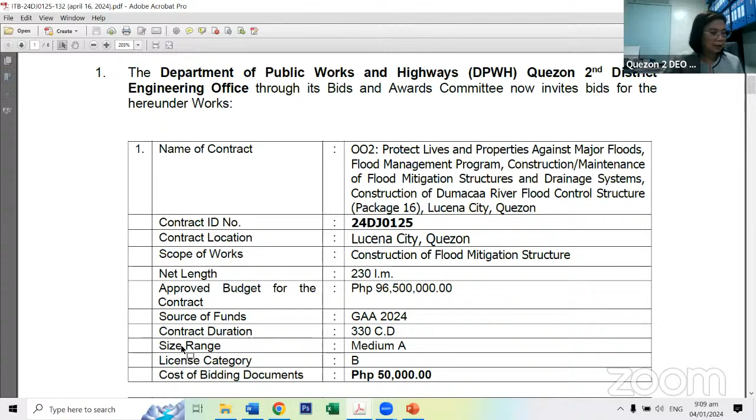Number 1 is 24DJ0125: Protect lives and properties against major flood, management program, construction and maintenance of flood mitigation structure and drainage system, construction of Dumacaa flood control structure, package 16, Lucena City, Quezon. Scope of work is construction of flood mitigation structure. Net length is 230 linear meters. Approved budget for the contract is 96,500,000 pesos. Contract duration is 330 calendar days. Size range of contractor is medium A with license category B. Cost of bidding documents is 50,000 pesos.

Next is 24DJ0126-002: Protect lives and properties against major flood, management program, construction and maintenance of flood mitigation structures and drainage system, construction of the Dumacaa flood control structure, package 17, Lucena City, Quezon. Scope of work, construction of flood mitigation structure, net length is 230 linear meters. Approved budget for the contract, 96,500,000 pesos.

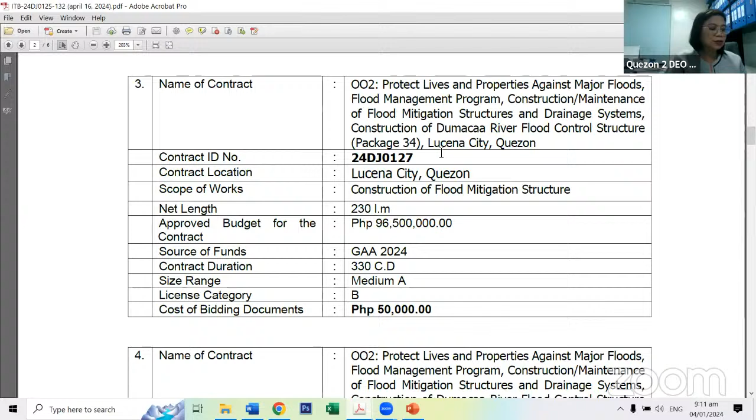24DJ0127-002, Protect Lives and Properties Against Major Flood Management Program, construction and maintenance of flood mitigation structure and drainage system, construction of Dumacaa River flood control structure, package 34, Lucena City, Quezon. Scope of work: construction of flood mitigation structure, net length is 230 linear meters. Approved budget for the contract is 96,500,000 pesos. Contract duration is 330 calendar days. Contractor size range is medium A with license category B. Cost of bidding documents is 50,000 pesos.

Number 4 is 24DJ0128-002. Protect Lives and Properties Against Major Flood Management Program, construction, maintenance of flood mitigation structure and drainage system, construction of Dumacaa River flood control structure, package 35, Lucena City, Quezon. Scope of work: construction of flood mitigation structure. Net length is 230 linear meters. Approved budget for the contract is 96,500,000 pesos. Contract duration is 330 calendar days. Contractor size range, medium A with license category B. Cost of bidding documents, 50,000 pesos.

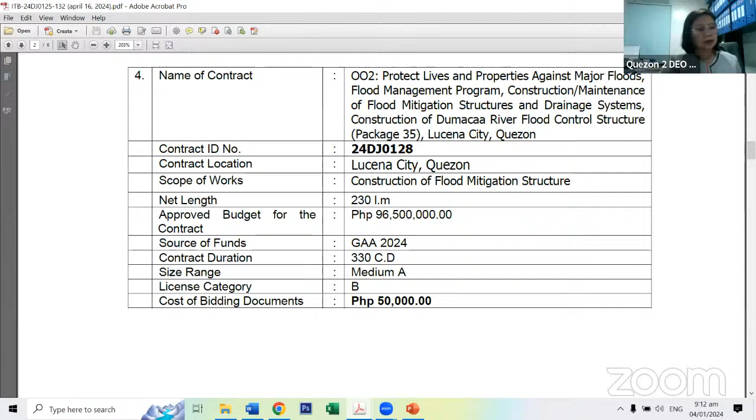Number 5 is 24DJ0129-002, Protect Lives and Properties Against Major Floods Management Program, construction, maintenance of flood mitigation structures and drainage systems, construction of Dumacaa River flood control structures, package 38, Lucena City, Quezon. Scope of work: construction of flood mitigation structure. Net length is 230 linear meters. Approved budget for the contract is 96,500,000 pesos. Contract duration, 330 calendar days. Contractor size range, medium A with license category B. Cost of bidding documents is 50,000 pesos.

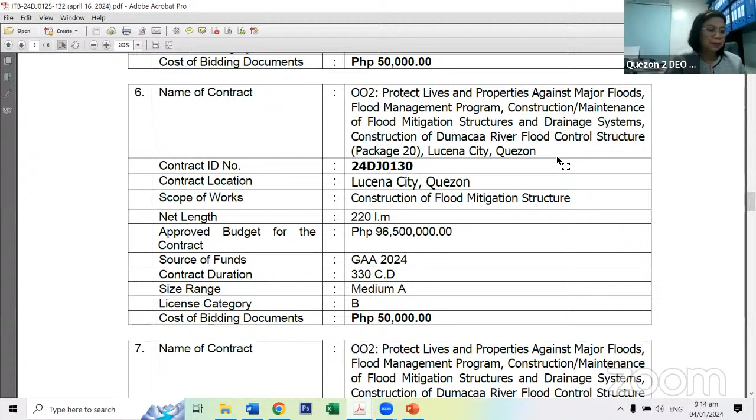Number 6, 002, Protect Lives and Properties Against Major Flood Management Program, construction, maintenance of flood mitigation structures and drainage systems, construction of Dumacaa River flood control structures, package 20, Lucena City, Quezon. Contract ID is 24DJ0130. Scope of work: construction of flood mitigation structure. Net length is 220 linear meters. Approved budget for the contract is 96,500,000 pesos. Source of fund, GAA 2024. Contract duration is 330 calendar days. Contractor size range, medium A with license category B. Cost of bidding documents, 50,000 pesos.

Number 7, 24DJ0131-002, Protect Lives and Properties Against Major Floods Management Program, construction, maintenance of flood mitigation structures and drainage system, construction of Dumacaa River flood control structures, package 36, Lucena City, Quezon. Scope of work: construction of flood mitigation structure. Net length is 230 linear meters. Approved budget for the contract is 96,500,000 pesos. Contract duration is 330 calendar days. Contractor size range, medium A with license category B. Cost of bidding documents, 50,000 pesos.

And number 8, 24DJ0132-002, Protect Lives and Properties Against Major Floods Management Program, construction, maintenance of flood mitigation structure and drainage system, construction of Dumacaa River flood control structure, package 37, Lucena City, Quezon. Scope of work: construction of flood mitigation structure. Net length is 230 linear meters. Approved budget for the contract is 96,500,000 pesos. Contract duration is 330 calendar days. Contractor size range, medium A with license category B. Cost of bidding documents is 50,000 pesos.

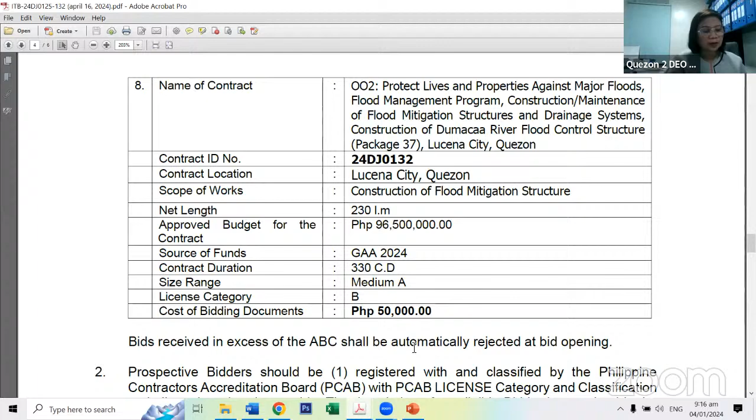So our bid opening is April 16, 2024 at 9 a.m., after the deadline of the submission of bids, at the BAC conference room. Thank you, and let's start the presentation of scope of work and plans.

Good morning po. Project name: 002, Protect Lives and Properties Against Major Floods Flood Management Program, Construction, Maintenance of Flood Mitigation Structures and Drainage Systems. Construction of Dumacaa River Flood Control Structure Package 16, Lucena City, Quezon, with contract ID of 24DJ0125.

Plans of the proposed project. This is the title page. Index of drawings. General construction notes. Legends. Design symbols. Location map, vicinity map, key map, layout plan. Summary of quantities.

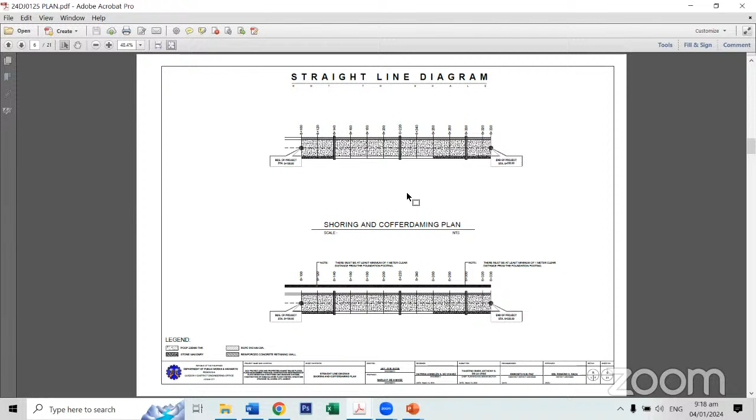Straight line diagram, shoring and cofferdam plan. Typical cross section. Weep holes, partial elevation, parapet blocks, and large section. Stone masonry typical cross section. Details of weep holes, section showing curb and gutter, section showing metal grating and catch basin. Pavement layout plan for roadway.

Detail section of retaining wall. Isometric drawings, cross section of sheet piles. Detailed plan of project billboard. Detailed plan of field office. Plan and profile of the project. And the rest are the cross sections of the project.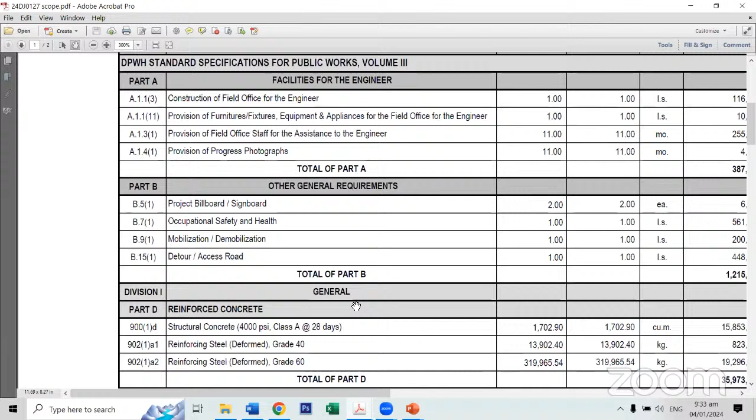For Part A, facilities for the engineer: construction of field office for the engineer, provision of furnitures, fixtures, equipment, and appliances for the field office for the engineer, provision of field office staff as assistants to the engineer, and provision of progress photographs. Part B, other general requirements: project billboard, signboard, occupational safety and health, mobilization, demobilization, detour, and access road.

For Part D, reinforced concrete: structural concrete 4,000 PSI Class A at 28 days. Reinforcing steel, deformed, grade 40. Reinforcing steel, deformed, grade 60.

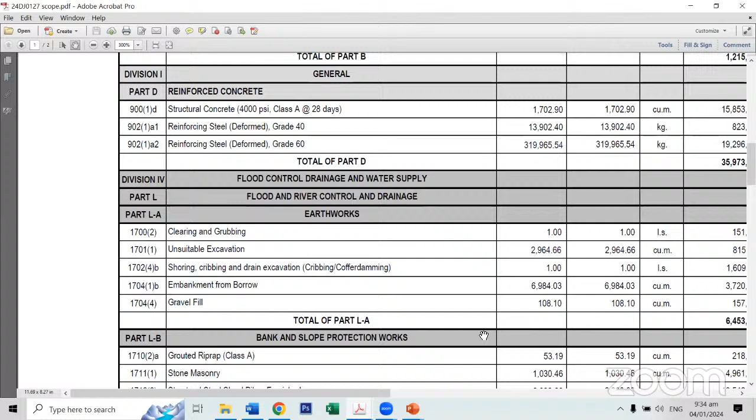For Part L-A, earthworks: clearing and grubbing, unsuitable excavation, shoring, cribbing and drain excavation, cribbing or coffer damming, embankment from borrow, gravel fill. Part L-B, bank and slope protection works: grouted riprap Class A, stone masonry, structural steel sheet piles furnished, structural steel sheet piles driven.

For Part L-C, drainage works: pipe culverts 910 millimeters diameter, Class 2 RCPC, adjusting catch basin. For Part C, earthworks: foundation fill, subgrade preparation, common material. Subbase and base course: aggregate subbase course.

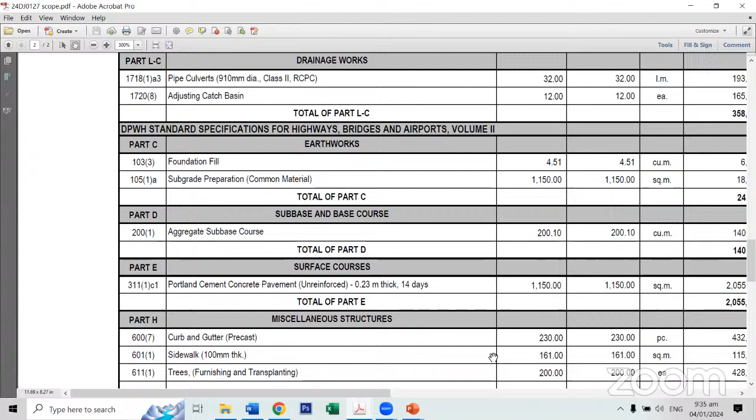For Part E, surface courses: Portland cement concrete pavement, unreinforced, 0.23 meters thick, 14 days. Part H, miscellaneous structures: curb and gutter precast, sidewalk 100 millimeters thick, trees furnishing and transplanting.

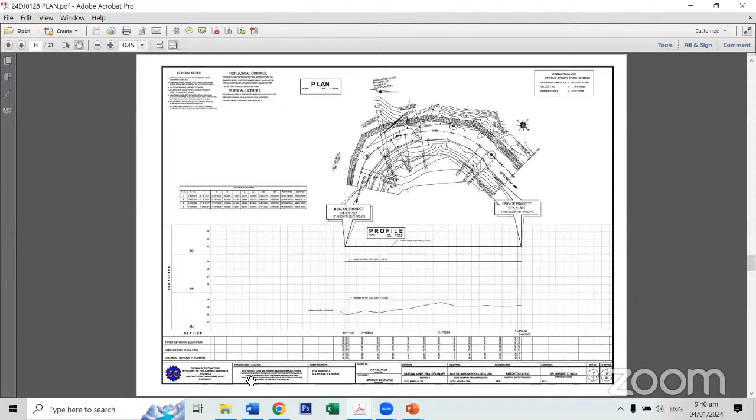For the scope of works of the project, Part A, facilities for the engineer: construction of field office for the engineer, provision of furnitures, fixtures, equipment, and appliances for the field office for the engineer, provision of field office staff for the assistance of the engineer, provision of progress photographs. Part B, other general requirements: project billboard, signboard, occupational safety and health, mobilization, demobilization, detour access road.

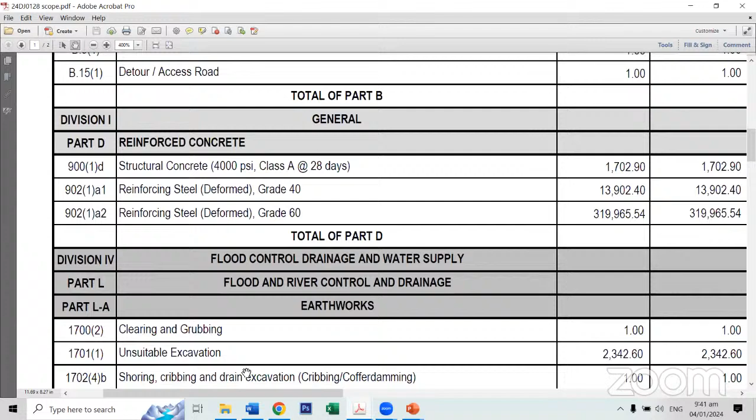For Part D, reinforced concrete: structural concrete 4,000 PSI Class A at 28 days. Reinforcing steel, deformed, grade 40. Reinforcing steel, deformed, grade 60.

For Part L-A, earthworks: clearing and grubbing, unsuitable excavation, shoring, cribbing and drain excavation, cribbing or coffer damming, embankment from borrow, gravel fill. For Part L-B, bank and slope protection works: grouted riprap Class A, stone masonry, structural steel sheet piles furnished, structural steel sheet piles driven.

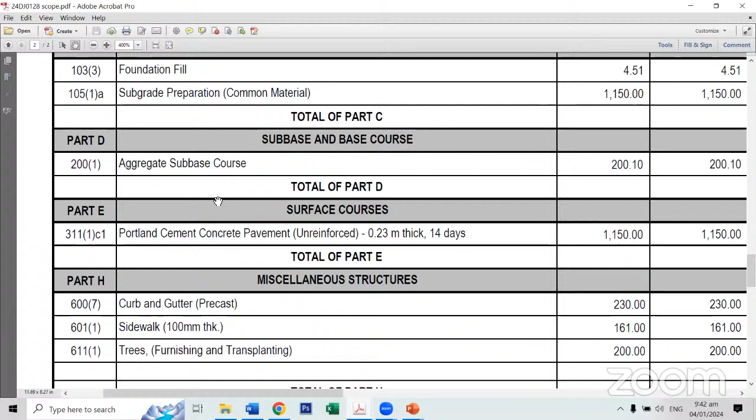For Part L-C, drainage works: pipe culverts 910 millimeters diameter, Class 2 RCPC, adjusting catch basin. For Part C, earthworks: foundation fill, subgrade preparation, common material. For Part D, subbase and base course: aggregate subbase course. Part E, surface courses: Portland cement concrete pavement, unreinforced, 0.23 meters thick, 14 days.

Part H, miscellaneous structures: curb and gutter precast, sidewalk 100 millimeters thick, trees furnishing and transplanting.

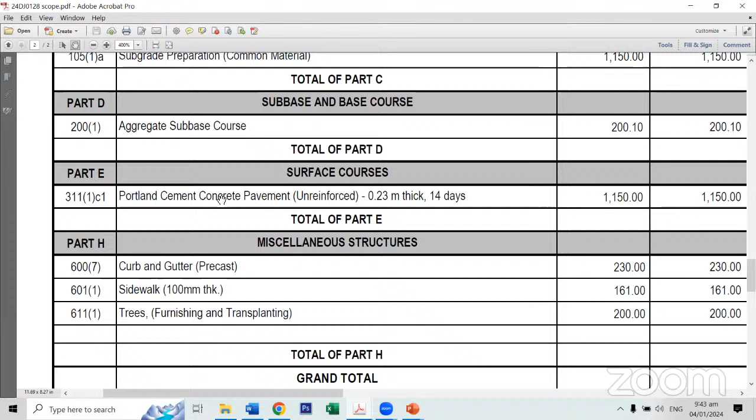Minimum equipment requirements: backhoe or backhoe with breaker, dump truck, plate compactor, cutting outfit, one bagger mixer, water pump, water truck, low bed trailer, vibratory roller, bar cutter, motorized road grader, bar bender, welding machine, cargo truck, truck mounted boom truck, generator set, vibro hammer, truck mounted crane, service crane, concrete vibrator, payloader, and joint sealer machine.

Manpower requirements: one project manager with 5 years total experience, one project engineer with 5 years total experience, one accredited materials engineer 1, one construction foreman with 5 years total experience, one first aider, and one safety officer.

Approved budget for the contract, 96,500,000 pesos. Contract duration, 330 calendar days.

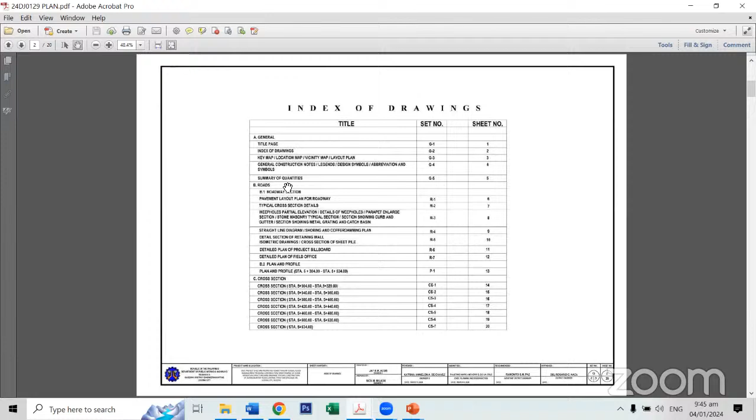Key map, vicinity map, location map, and layout plan.

General construction notes.

Summary of quantities. Pavement layout plan for roadway. Detailed connection of reinforced structure to sidewalk and parapet blocks. Detail of expansion joint at certain intersections and structures.

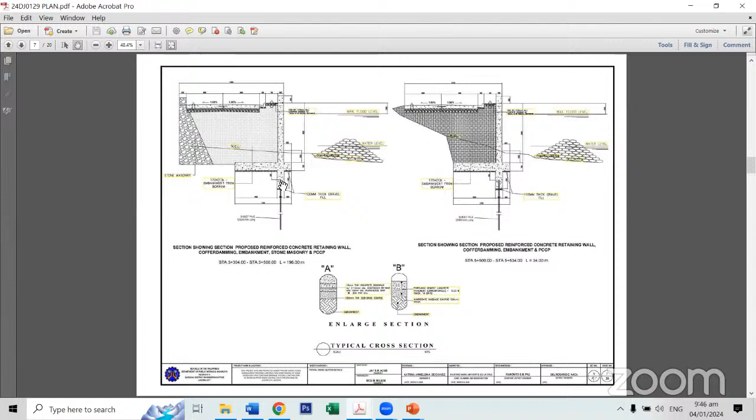Typical cross-section. Weepholes, partial elevation. Details of weepholes. Sections showing curb and gutter.

Parapet enlarge section. Stone masonry typical cross-section. Section showing metal grating and catch basin.

Straight line diagram, shoring and cofferdamming plan. Detailed section of retaining wall, isometric drawing, cross-section of sheet pile.

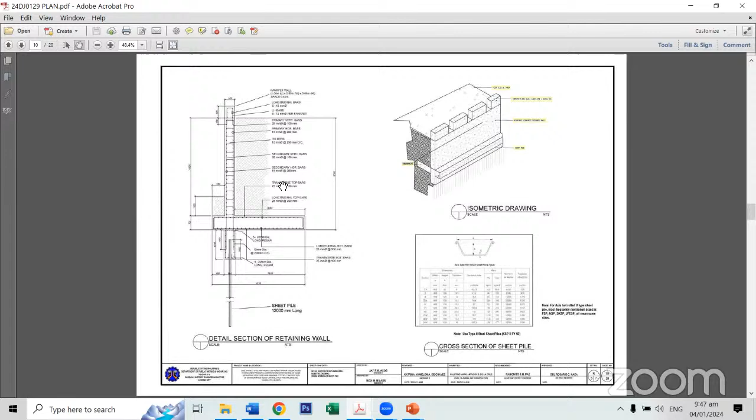Detailed plan of project billboard. Detailed plan of field office.

Plan and profile for the project. And cross sections for the project.

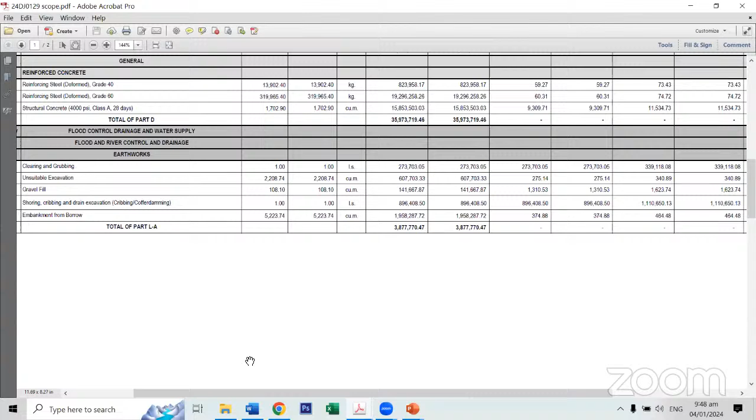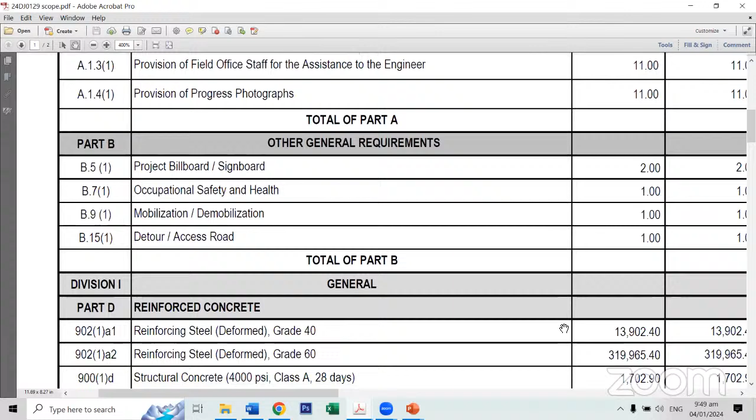For part A, facilities for the engineer: construction of field office for the engineer, provision of furnitures, fixtures, equipment, and appliances for the field office for the engineer, provision of field office staff for the assistance to the engineer, provision of progress photographs. Part B, other general requirements: project billboard, signboard, occupational safety and health, mobilization, demobilization, detour, access road.

Part D, reinforced concrete: reinforcing steel deformed, grade 40, reinforcing steel deformed, grade 60. Structural concrete, 4,000 PSI, class A, 28 days.

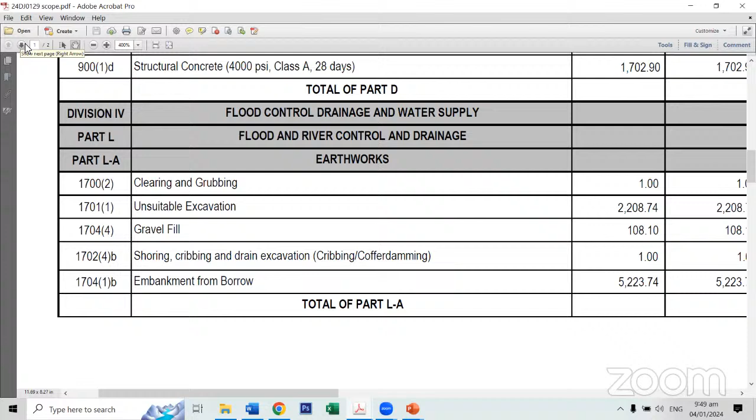For part L-A, earthworks: clearing and grubbing, unsuitable excavation, gravel fill, shoring, cribbing and drain excavation, cribbing, coffer damming, embankment from borrow.

For part L-B, bank and slope protection works: stone masonry, structural steel sheet piles furnished, structural steel sheet piles driven. For part L-C, drainage works: pipe culverts, 910 millimeters diameter, class 2 RCPC, adjusting catch basin.

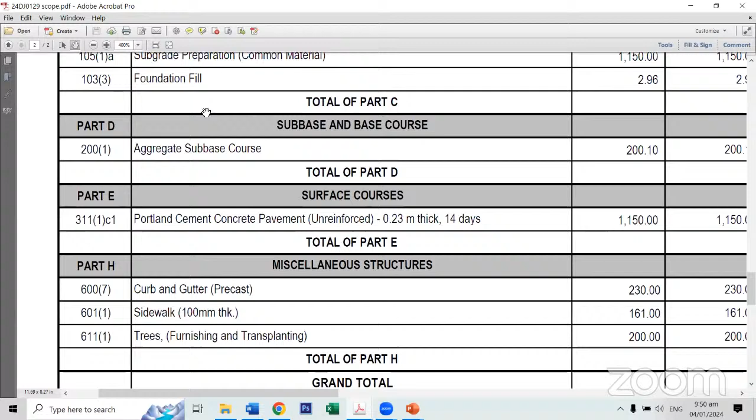For part C, earthworks: subgrade preparation, common material, foundation fill. For part D, sub-base and base course: aggregate sub-base course. For part E, surface courses: Portland cement concrete pavement unreinforced, 0.23 meters thick, 14 days. Part H, miscellaneous structures: curb and gutter, precast, sidewalk, 100 millimeters thick, trees, furnishing, and transplanting.

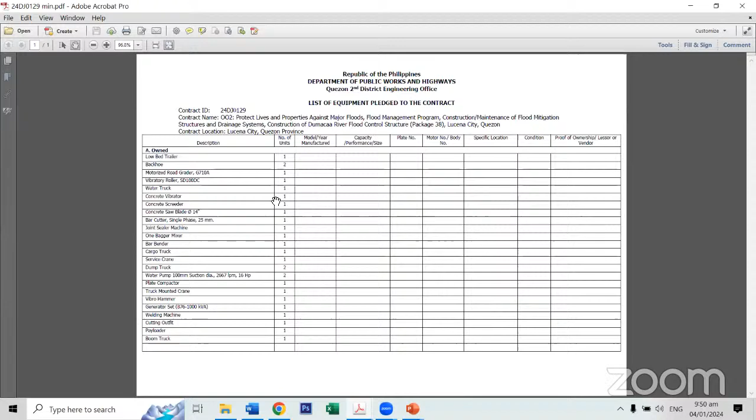Minimum equipment requirements. Low bed trailer.

Backhoe, motorized road grader, vibratory roller, water truck, concrete vibrator, concrete screeder, concrete saw blade, bar cutter, joint sealer machine, one bagger mixer, bar bender, cargo truck, service crane, dump truck, water pump, plate compactor, truck mounted crane, vibro hammer, generator set, welding machine, cutting outfit, payloader, and boom truck.

Manpower requirements: one project manager with 5 years total experience, one project engineer with 5 years total experience, one accredited materials engineer 1, one construction foreman with 5 years total experience, 1 first aider, and 1 safety officer.

Approved budget for the contract, 96,500,000 pesos. Contract duration, 330 calendar days.

Okay, question po Maya.

O, next slide po tayo. Thank you.

FY 2024 Flexible Infrastructure Program 002 for Protect Lives and Properties Against Major Floods, Flood Management Program, Construction Maintenance of Flood Mitigation Structures, and Drainage Systems, Construction of Dumacaa River Flood Control Structure, Package 20, Lucena City, Quezon, with contract ID 24DJ0130.

Plans of the proposed project.

Hello po. Pwede po malakas ng ate yung boses. Thank you po. Plans of the proposed project.

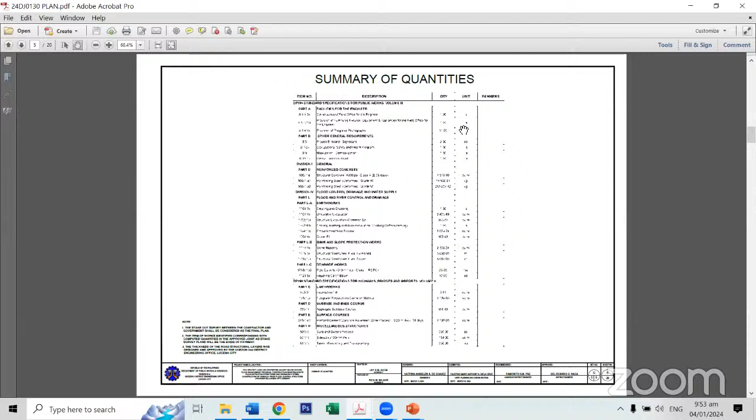Summary of quantities. Pavement layout plan for roadway.

Typical cross section, stone masonry typical cross section, detail of weep holes partial elevation, straight line diagram.

Detail section of retaining wall. Isometric drawing, cross section of sheet pile.

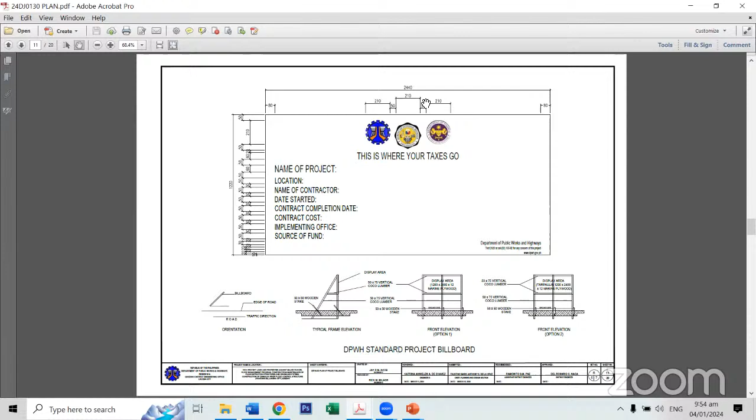Detailed plan of project billboard. Detail of field office.

Plan and profile. And the rest are cross sections.

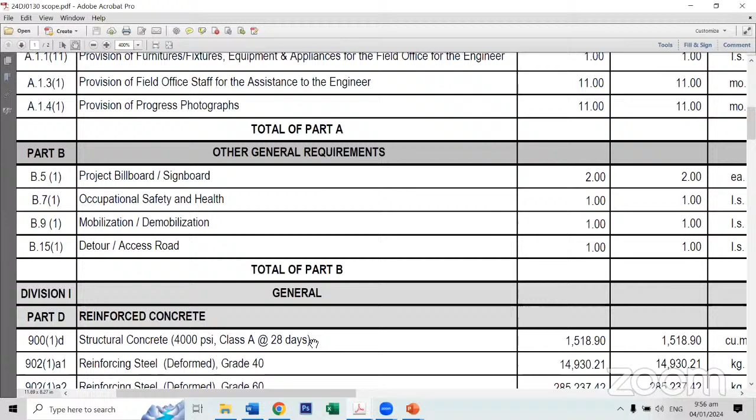DPWH standard specification for public works volume 3, part A, facilities for the engineer: A.1.1.3 construction of field office for the engineer, A.1.1.11 provision of furniture, fixtures, equipment, and appliances for the field office for the engineer, A.1.3.1 provision of field office staff for the assistance to the engineer, A.1.4.1 provision of progress photographs.

For part B, other general requirements: B.5.1 project billboard signboard, B.7.1 occupational safety and health, B.9.1 mobilization demobilization, B.15.1 detour access road. Or division 1 general.

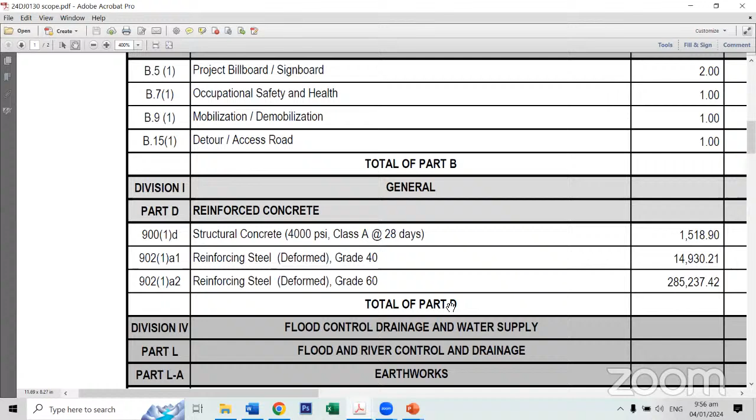Part D, reinforced concrete: 900 1D structural concrete 4,000 PSI, class A at 28 days, 902 1A1 reinforcing steel deformed grade 40, 902 1A2 reinforcing steel deformed grade 60.

Or division 4, flood control drainage and water supply. Part L, flood and river control and drainage. Part L-A, earthworks: 1702 clearing and grubbing.

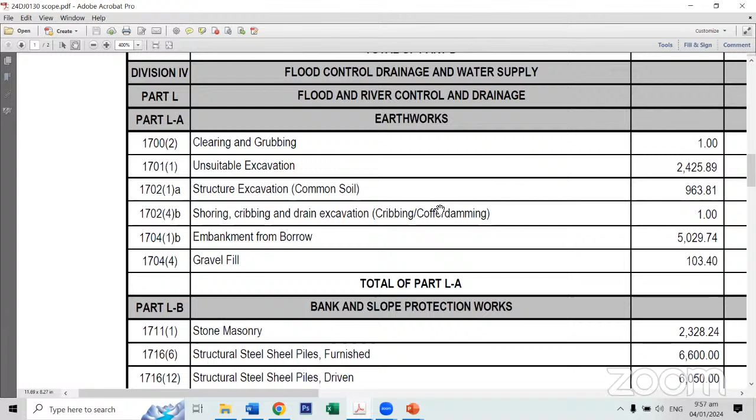1701 unsuitable excavation, 1702-1A structure excavation common soil, 1702-4B shoring and cribbing and drainage excavation, 1704-1B embankment from borrow, 1704 gravel fill. For part L-B, bank and slope protection works.

1711 stone masonry, 1716-6 structural steel sheet pile furnish, 1716-12 structural steel sheet pile driven.

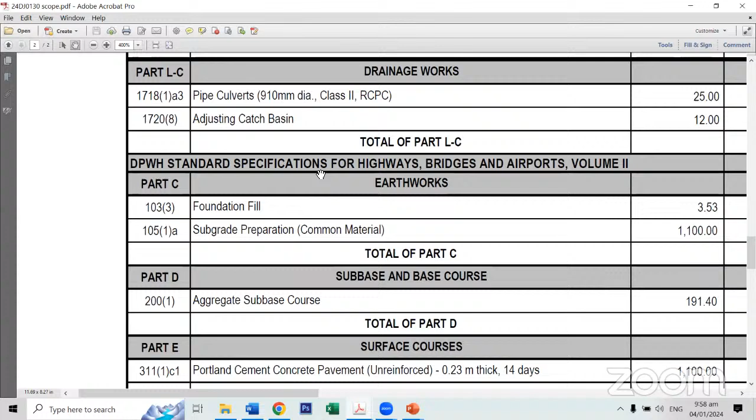For part L-C drainage works: 1718-1A3 pipe culverts, 1720-8 adjusting catch basin. For DPWH standard specification for highways, bridges, and airports, volume 2, part C earthwork.

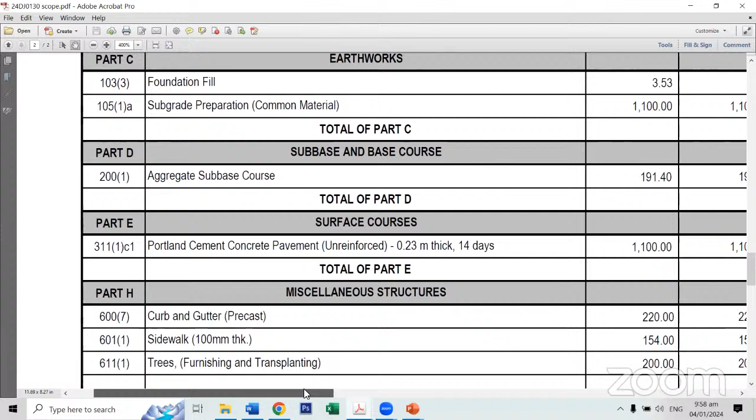103-3 foundation fill, 105-1A subgrade preparation common material. Part D sub-base and base course: 200-1 aggregate sub-base course. Part E surface courses: 311-1C1 Portland cement concrete pavement.

Part H miscellaneous structures: 600-7 curb and gutter precast, 601 sidewalk, 611 trees furnishing and transplanting.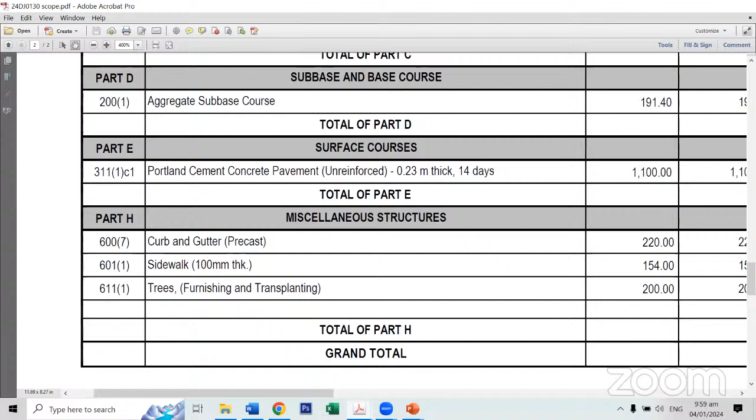Minimum equipment requirements: one low bed trailer, two backhoe, one motorized road grader,

two water pump, one plate compactor, one truck mounted crane, one vibro hammer, one generator set, one welding machine, one cutting outfit, one payloader, one boom truck.

Manpower requirement: one project manager with 5 years of total experience, one project engineer with 5 years of total experience, one accredited materials engineer, one construction foreman with 5 years of total experience, one first aider, one safety officer.

The approved budget for the contract is 96,500,000 pesos and the contract duration is 230 calendar days.

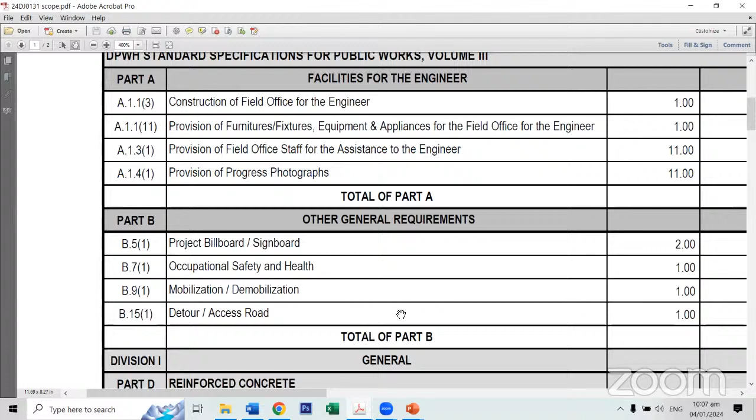Project billboard, signboard, occupational safety and health, mobilization, demobilization, detour, access road.

Part D, reinforced concrete: structural concrete 4,000 PSI, class A at 28 days, reinforcing steel deformed grade 40, reinforcing steel deformed grade 60.

Part L-A, earthworks: clearing and grubbing, unsuitable excavation, shoring, cribbing and drain excavation, cribbing cofferdamming, embankment from borrow, gravel fill.

Part L-B, bank and slope protection work: stone masonry, structural steel sheet piles furnished, structural steel sheet piles driven.

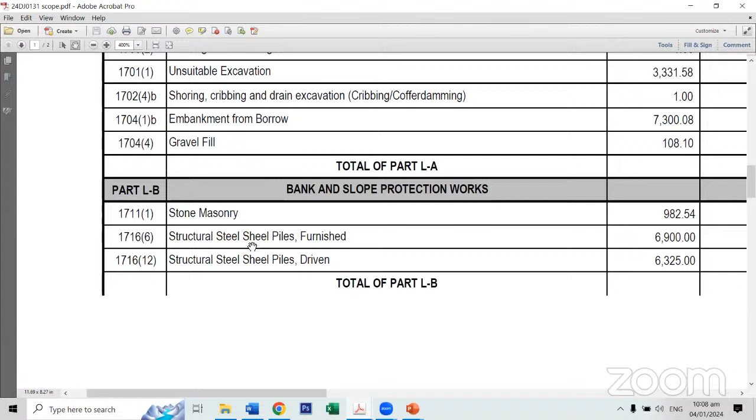Part L-C, drainage works: pipe culverts 910 millimeters diameter, class 2 RCPC, adjusting catch basin. Part C, earthworks: foundation fill, subgrade preparation, common material.

Part D, subbase and base course: aggregate subbase course. Part E, surface courses: Portland cement concrete pavement unreinforced, 0.23 meters thick, 14 days.

For Part H, miscellaneous structures: curb and gutter precast, sidewalk 100 millimeters thick, trees furnishing and transplanting.

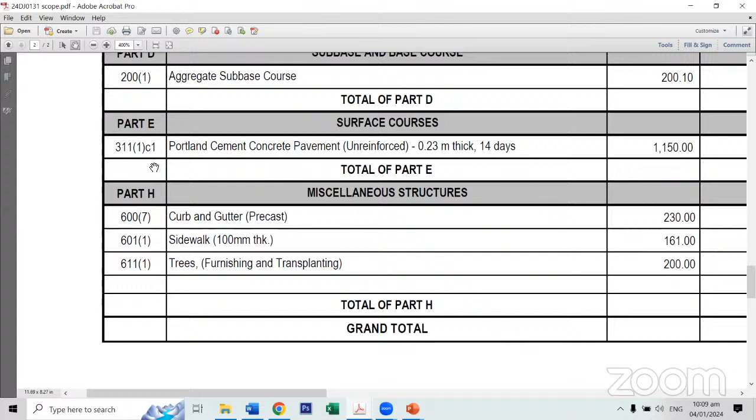Minimum equipment requirements: backhoe or backhoe with breaker, dump truck, plate compactor, cutting outfit, one bagger mixer, water pump, water truck, low bed trailer, vibratory roller, bar cutter, motorized road grader, bar bender, welding machine, cargo truck, truck-mounted boom truck, generator set, vibro hammer, truck-mounted crane, service crane, concrete vibrator, payloader, and joint sealer machine.

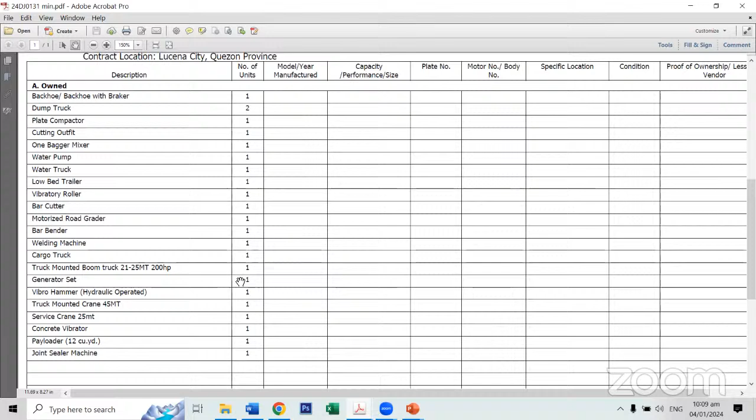Manpower requirements: one project manager with 5 years total experience, one project engineer with 5 years total experience, one accredited materials engineer with 5 years total experience, one first aider, and one safety officer.

Approved budget for the contract: 96,500,000 pesos. Contract duration: 330 calendar days.

For our next project, OO2, Protect Lives and Properties against Major Floods, Flood Management Program, Construction, Maintenance of Flood Mitigation Structures and Drainage Systems, Construction of the Dumacaa River Flood Control Structure, Package 37, Lucena City, Quezon, with contract ID 24DJ0132.

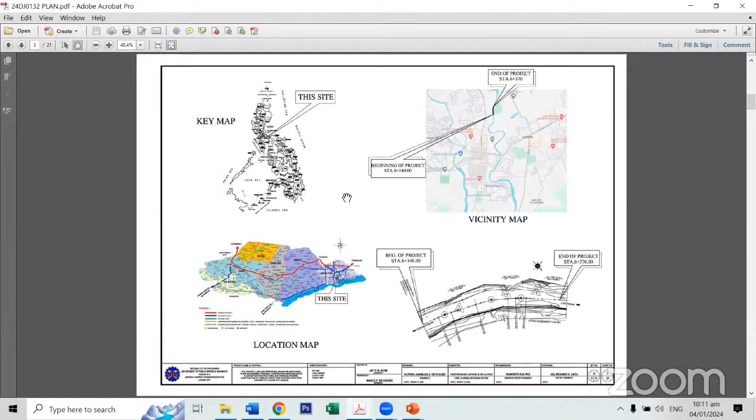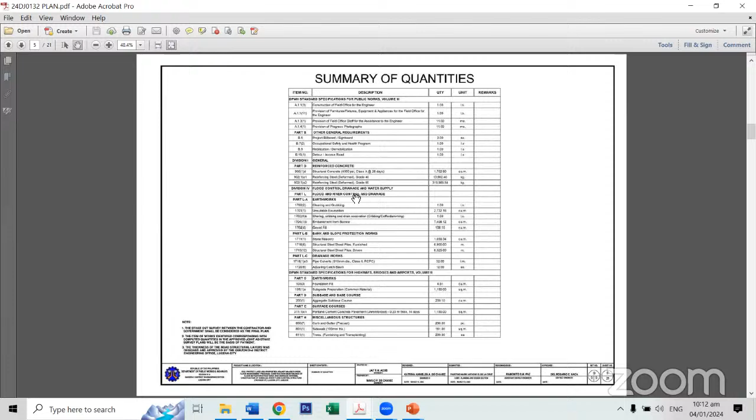General construction notes, summary of quantities, and pavement layout plan for the pathway.

Detailed connection of reinforced structure to sidewalk and pavement blocks, parapet blocks, detail of expansion joint at certain intersections in the structures, and typical cross-section.

Weep holes partial elevation with details of weep holes, section showing curb and gutter, stone masonry typical cross-section with parapet blocks and large section, and section showing metal grating and catch basin.

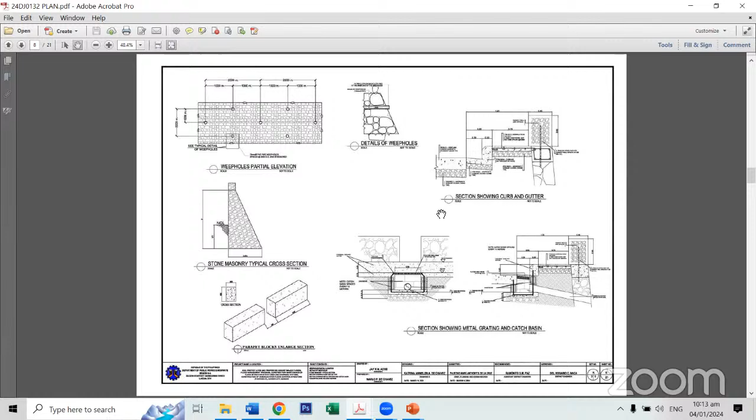Straight line diagram, shoring and coffer damming plan, detail section of retaining wall, isometric drawing, and cross section of sheet pile.

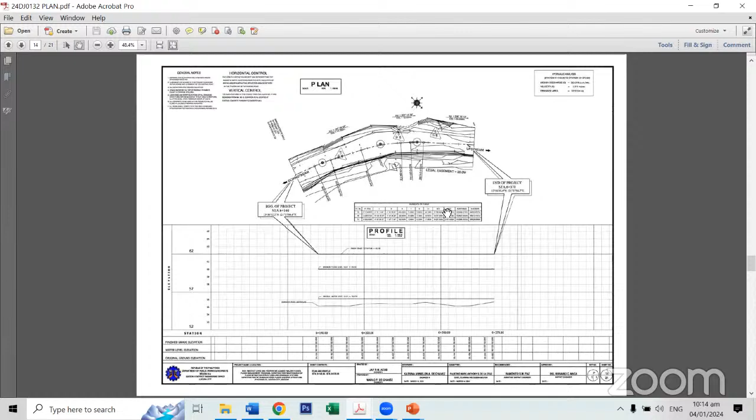Detailed plan of the project billboard, detailed plan of the field office, plan and profile for the project, and cross sections of the project.

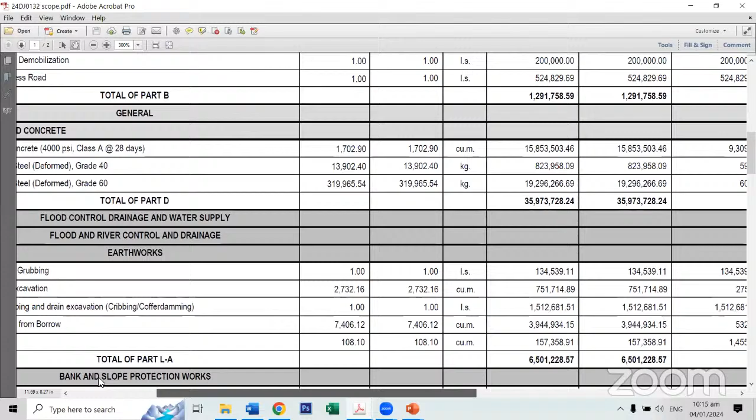Scope of works. For Part A, facilities for the engineer: construction of field office for the engineer, provision of furniture, fixtures, equipment, and appliances for the field office for the engineer, provision of field office staff for the assistants to the engineer, and provision of progress photographs. Part B, other general requirements: project billboard, signboard, occupational safety and health, mobilization, demobilization, and detour access road.

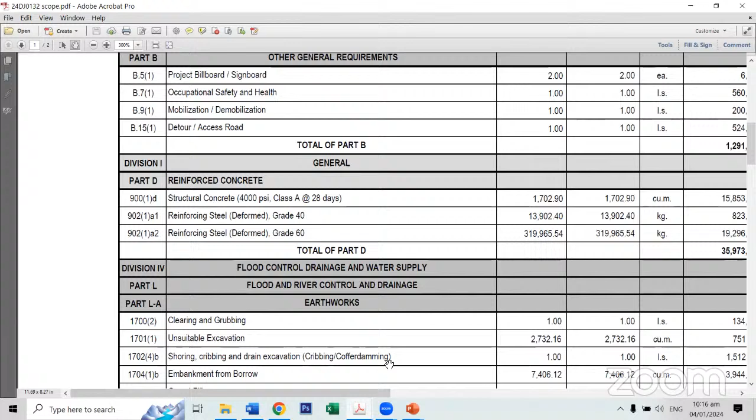For Part D, reinforced concrete: structural concrete 4,000 PSI class A at 28 days, reinforcing steel deformed grade 40, reinforcing steel deformed grade 60. For Part L-A, earthworks: clearing and grubbing, unsuitable excavation, shoring, cribbing and drain excavation, cribbing, coffer damming, embankment from borrow, and gravel fill.

For Part L-B, bank and slope protection works: stone masonry, structural steel sheet piles furnished, structural steel sheet piles driven. Part L-C, drainage works: pipe culverts 910 millimeters diameter class 2 RCPC, adjusting catch basin.

Part C, earthworks: foundation fill, subgrade preparation, common material. Part D, subbase and base course: aggregate subbase course. Part E, surface courses: Portland cement concrete pavement unreinforced, 0.23 meters thick, 14 days. Part H, miscellaneous structures: curb and gutter precast, sidewalk 100 millimeters thick, trees furnishing and transplanting.

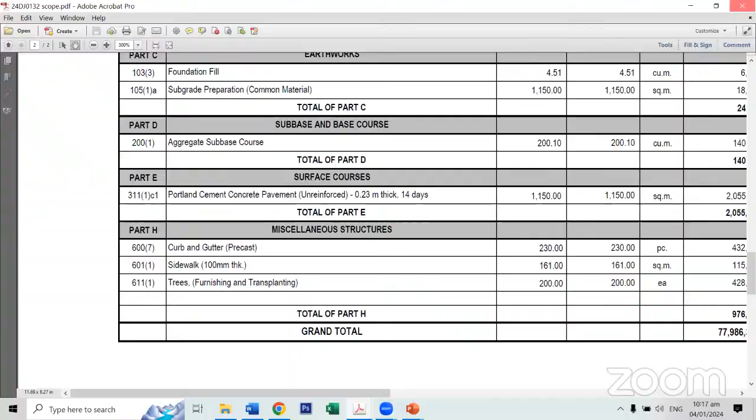Minimum equipment requirements: backhoe or backhoe with breaker, dump truck, plate compactor, cutting outfit, one bagger mixer, water pump, water truck, low bed trailer, vibratory roller, bar cutter, motorized road grader, bar bender, welding machine, cargo truck, truck mounted boom truck, generator set, vibro hammer, truck mounted crane, service crane, concrete vibrator, payloader, joint sealer machine.

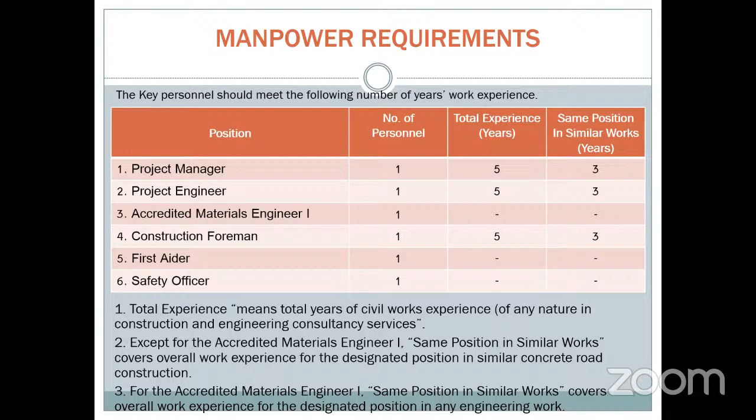Manpower requirements: one project manager with 5 years total experience, one project engineer with 5 years total experience, one accredited materials engineer, one construction foreman with 5 years total experience, one first aider, and one safety officer. Approved budget for the contract: 96,500,000 pesos. Contract duration: 330 calendar days.

May question po kaya?

Kung wala po, sige po. Kasi na po tayo sa submission of bids. Thank you.

Submission of bids. The two envelope system: one original copy of the technical proposal in a sealed envelope and one original copy of the financial bid proposal in a sealed envelope, placed in one sealed envelope. Bidding date April 16, 2024. Submission of bidding documents until 9 a.m. only, and opening of bidding documents at 9 o'clock a.m.

Bids must be duly received by the BAC Secretariat through manual submission or online electronic submission as per DO number 87 series of 2020. For advertisement, electronic bids underscore Quezon 2 at dpwh.gov.ph is the assigned email address of the Quezon 2 DEO where electronic bids shall be submitted and received. It is specified in the invitation to bid and bidding documents of the contract, which allows submission of electronic bids.

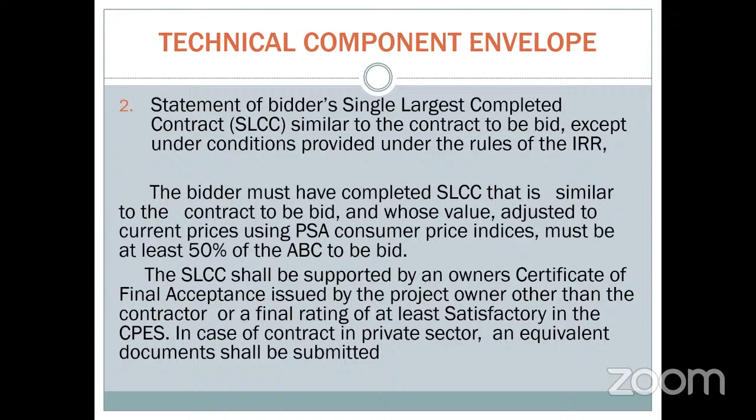Number three, the Philippine Contractors Accreditation Board license, or the PCAB license, or special PCAB license in case of joint ventures.

For financial documents, NFCC must be at least equal to the ABC to be bid. The NFCC is the current assets minus current liabilities, minus the value of all outstanding or uncompleted portions of the projects under ongoing, including awarded contracts yet to be started, coinciding with the contract to be bid.

Number two, the audited financial statement showing, among others, the prospective bidder's total current assets and liabilities, stamped received by the BIR or its duly accredited and authorized institution, for the preceding calendar year, which should not be earlier than 2 years from the date of bid submission.

Number three, the bid security: an original copy of notarized bid securing declaration using the prescribed format, or any form of bid security in an amount equal to a percentage of the ABC in accordance with the following schedule of IRR section 27.2. A, cash or cashier's or manager's check issued by a universal or commercial bank, 2% of ABC.

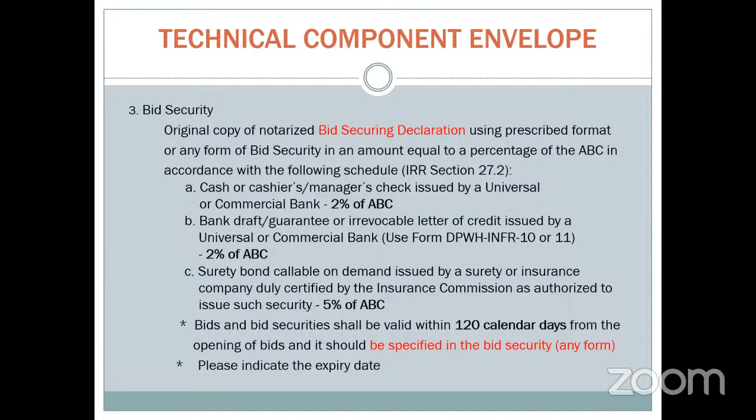Project requirements, which shall include the following. A, organizational chart for the contract to be bid, form DPWH Infra 12. B, the list of contractor's key personnel, including project manager, project engineer, materials engineer, and foreman, to be assigned to the contract to be bid, with their complete qualification and experience data, form DPWH Infra 13.

C, the duly signed list of contractor's pledged major equipment units, which are owned and/or under purchase agreement, supported by proof of ownership or certification of availability of equipment from the equipment lessor or vendor, for the duration of the project. This equipment must meet the minimum major equipment requirements for the contract set in the BDS, form DPWH Infra 14. Please note that pledged equipment must comply with DO number 9 and DO number 58, both series of 2012.

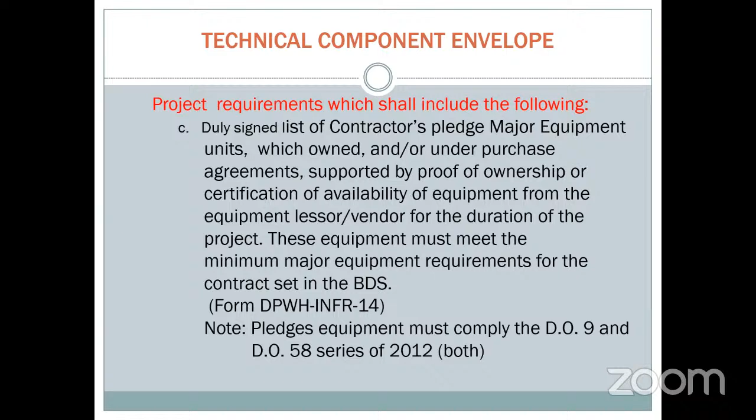D, the original duly signed omnibus sworn statement in accordance with section 25.3 of the IRR, and if applicable, original notarized secretary's certificate in case of a corporation, partnership, or cooperative, or original special power of attorney upon members of the joint venture, giving full power and authority to its officer to sign the OSS and do acts to represent the bidder.

For Class B documents, if applicable, duly signed joint venture agreement in accordance with RA number 4566 and its IRR, in case the joint venture is already in existence.

Checklist for the financial component envelope, second envelope.

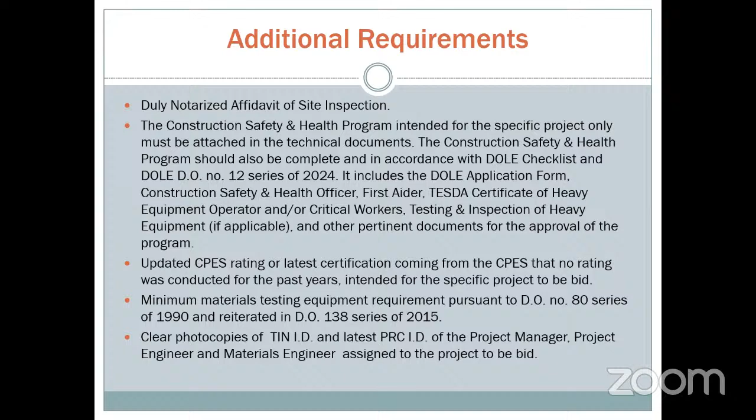Criteria of eligibility screening, preliminary examination of bids, evaluation of bids, and post-qualification as per 2016 revised IRR of RA 9184 and latest GPPB issuances. The first envelope shall be opened to determine the compliance with the documents required to be submitted for eligibility and for the technical requirements as prescribed in the IRR.

The BAC shall check the submitted documents of each bidder against a checklist of requirements to ascertain if they are all present, using pass or fail criterion. For every document required that is present, it shall be rated pass, but in case of failure to include any of the requirements resulting to incomplete required documents, it shall be considered failed. Otherwise, the BAC shall rate the first envelope pass.

Immediately after determining the compliance of the first envelope, the BAC shall open the second envelope, or the financial document, using again the pass or fail criterion in determining compliance based on the checklist requirements. When the bid price exceeds the approved budget for the contract or ABC, it is automatically rated as failed.

All bids shall be subject for evaluation, and the lowest calculated bid or the highest rated bid shall undergo post-qualification to determine whether the bidder concerned complies with and is responsive to all the requirements and conditions as specified in the bidding documents.

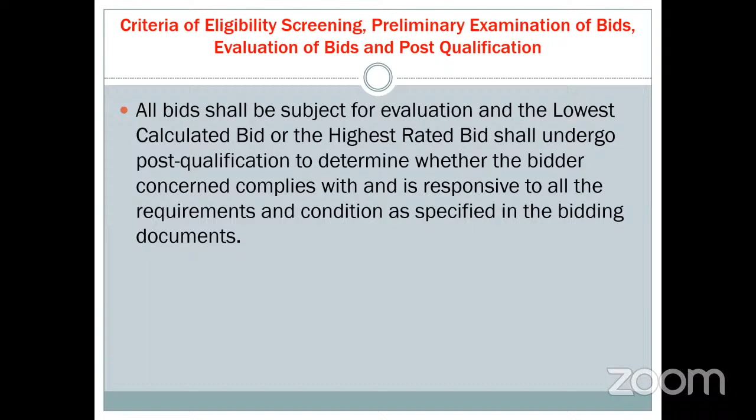Additional information: entering into contract requirements to be complied by the winning bidder. 1. Construction method using form DPWH Infra 45. 2. Construction schedule in the form of precedence diagram and bar chart with S-curve and cash flow, including the duration of the project or number of days, using form DPWH Infra 46. 3. Manpower schedule using form DPWH Infra 47. 4. Equipment utilization schedule using form DPWH Infra 48.

Reminder to bidders who will submit manually, and to bidders who submitted their bids online, that they will submit their original documents.

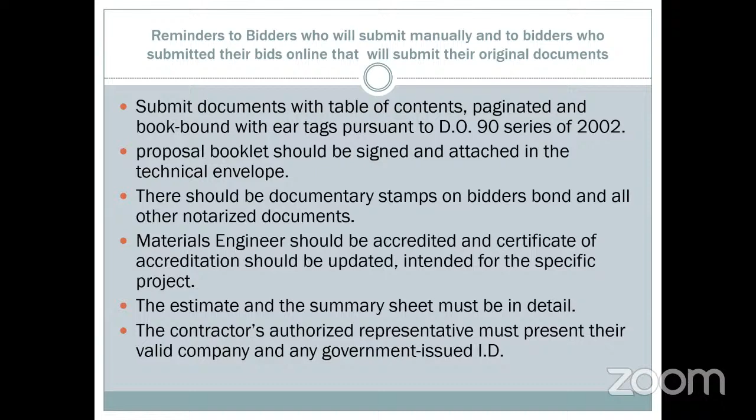Submit documents with table of contents, paginated and book-bound with ear tags pursuant to DO 90 series of 2002. Proposal booklet should be signed and attached in the technical envelope. There should be documentary stamp on bidder's bond and all other notarized documents. Materials engineer should be accredited and certificate of accreditation should be updated, intended for the specific project. The estimate and the summary sheet must be in detail. The contractor's authorized representative must present their valid company ID and any government-issued ID.

Reminder to all users: please use A4 size bond paper for technical and financial bid proposal. Use the prescribed infra form which you can find in the bid proposal booklet updated March 31, 2021. DO 35 series of 2008, the guidelines in the implementation of the 3-strike policy in procurement of civil works and consultancy services contracts by the department, and reiterated in DO 20 series of 2004. The 3-strike policy in the procurement of contracts for infrastructure works, goods, and consulting services.